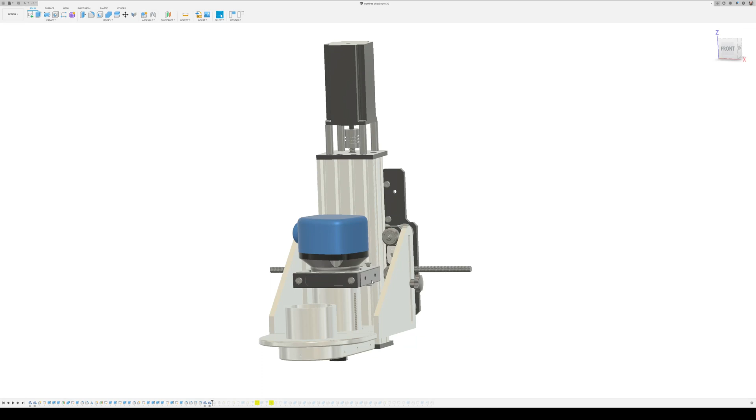I had a question come in on how I actually did the modeling for my dust shoe on my Workbee 1010. I'll go ahead and show you that here. I'm using Fusion 360 for this, and let's turn off all the dust shoe components for now.

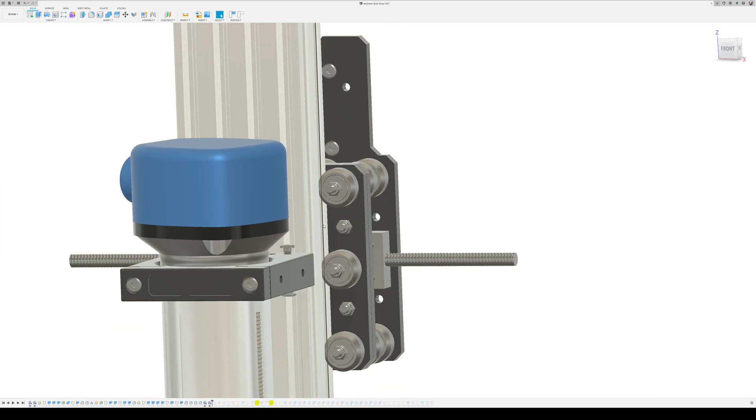So when I built my kit, when it came from Open Builds, I knew that I wanted to attach some type of dust shoe to this and be independent of the Z axis. So when I built my kit and made the X gantry, I actually used some longer screws to hold these two plates together. I think I picked maybe a 25 millimeter screw, and it used to be maybe a 10. This screw here sticks out about probably another half an inch, maybe.

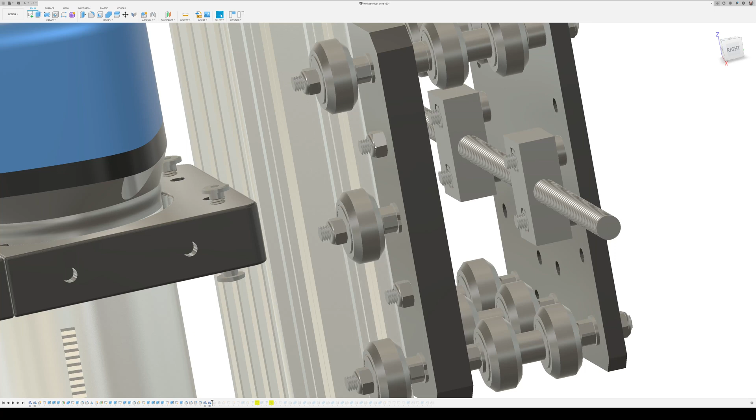And that's where I was going to be able to attach my dust shoe. So if you look at the front of this, from the front view, you can have something mount to these four screws here, and then you just had to make sure that when you did the modeling, you didn't have a collision between whatever your dust shoe and this Z-axis.

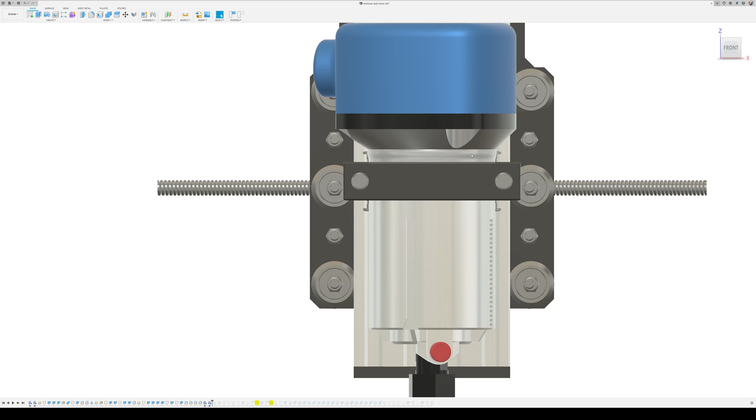So we'll go ahead and turn on that mount first, and it looks like this here. So this mount actually rides right on top of that screw, and if you had to take into account the bolt was still there. So if we turn this back off again, you see that that nut is still there. So when I did the modeling for this, I needed to provision for that nut.

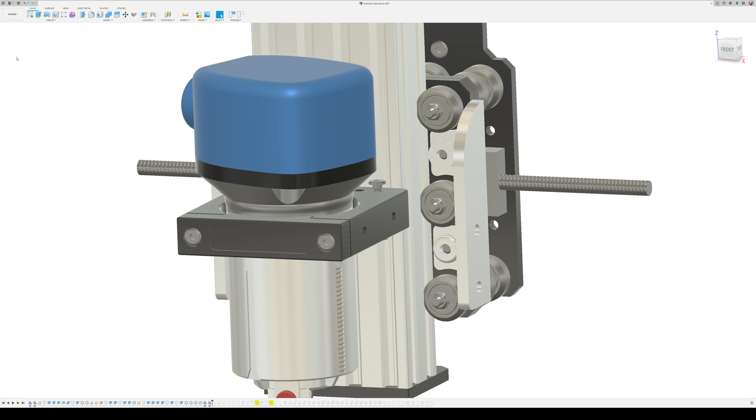So on the back side of this thing, I have a recess in here that the nut sits inside of, and the longer screw fits to this front. So then also what I ended up doing on the side here was I put in a rivnut, an M5 rivnut, and it looks like this here.

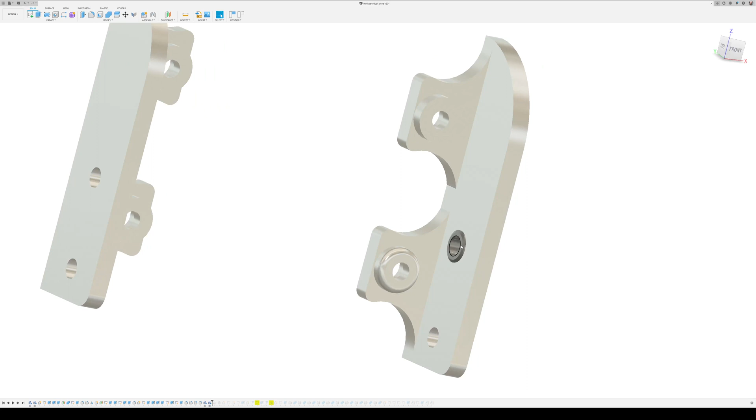So this rivnut I just press fit it in there, and it's a threaded nut, and it's really meant for being pushed into something like steel, so you can have a threaded insert into some steel. But this ABS was very forgiving, and I just pressed it in with a vise.

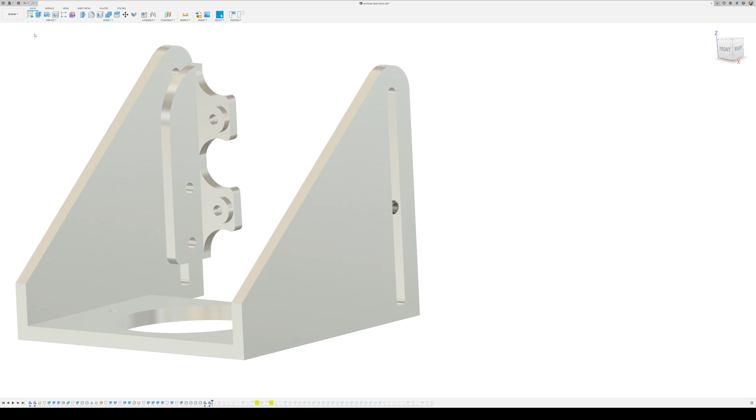So the slider looks like this here. So the slider fits on. Let me turn the spindle back on here. So the slider sits on, and there's a slot on this side. And so this part actually moves up and down, and that controls the height of the actual bristles on the dust shoe part.

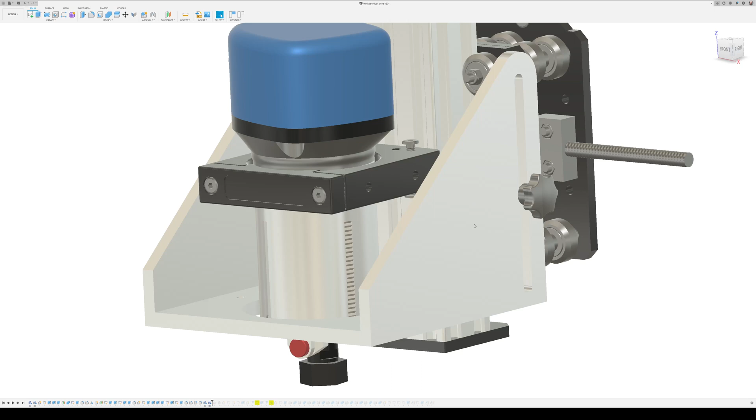And in order to attach it, I got the thumb... what do they call these things? Thumb screw or something like that. This is the M5 thumb screw. So that's that there. And then on the bottom of this slider part, I put in some recesses for some magnets.

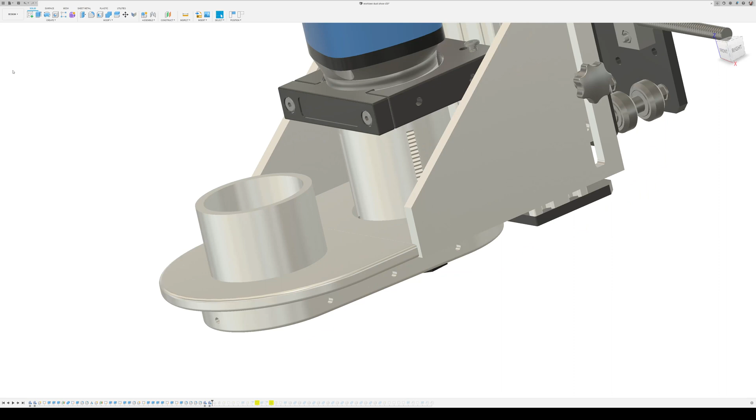And then if we turn on this, the thing that holds my brush plate part, doesn't look like it - something got messed up with what I was doing, but let me turn this part off. Let's just look at the brush plate part.

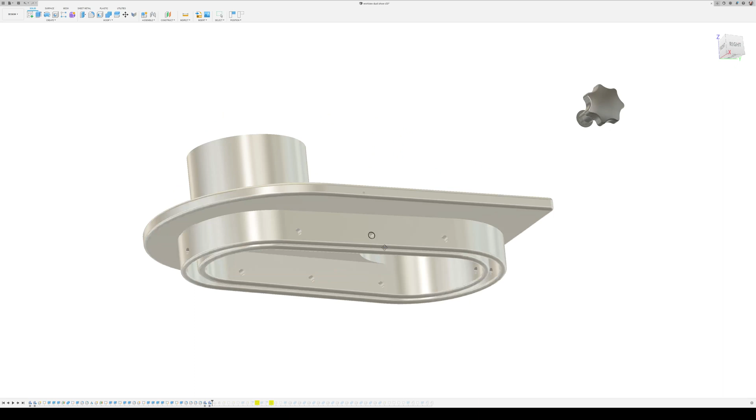Okay, so down here on the bottom of this, I put in like a trough that will grab the top of the brush, and then I put in some holes here for some number 6 wood screws, and those go through the plastic and hold the brush in place. And then I just had to make sure that I have the right hole diameter for the router to fit through.

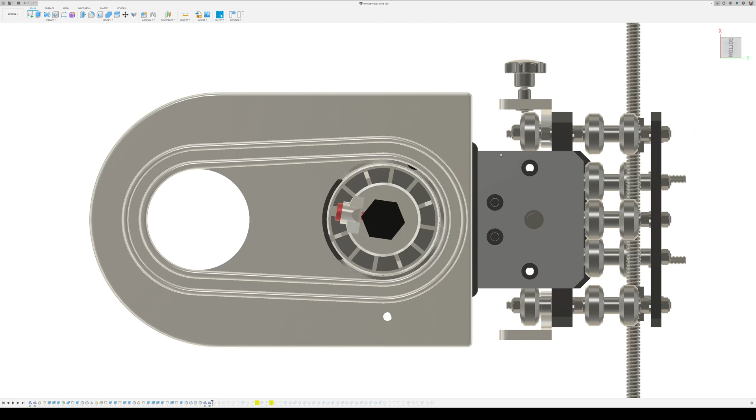And then also had to provision to make sure that - let's turn everything on here - from the bottom side that the spindle as well as this piece of extrusion here did not have a collision here. So that's really kind of what I did for the modeling.

It was really pretty simple, and you can 3D print this on any 3D printer.